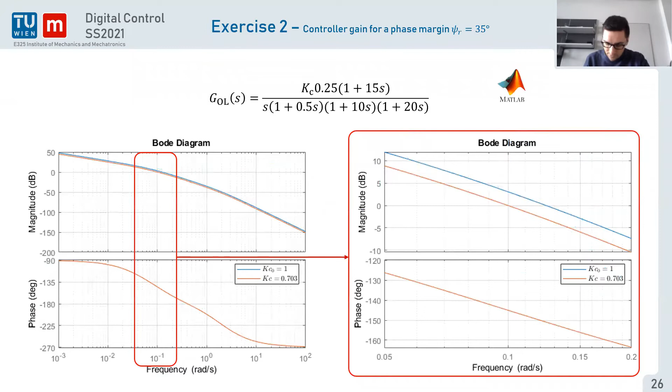And after that, the obvious thing to do is to discretize our controller with these three methods. So remember this backward difference method. I can just go through one of them once again, just to remember what we were doing. So we have our controller in continuous time. We know what Kc is. We found it was 0.7 something. The first method is this one.

It's the backward difference. So backward difference, it's like equivalent to approximating a derivative with a first order difference equation. Okay. So basically it's more or less the same as saying a derivative, or let's call it differently. The underlying idea is that this is more or less equal to y(kT) minus y((k-1)T) divided by the sample time. Okay, this is the underlying idea. It's not exactly this, but it's the idea behind this method.

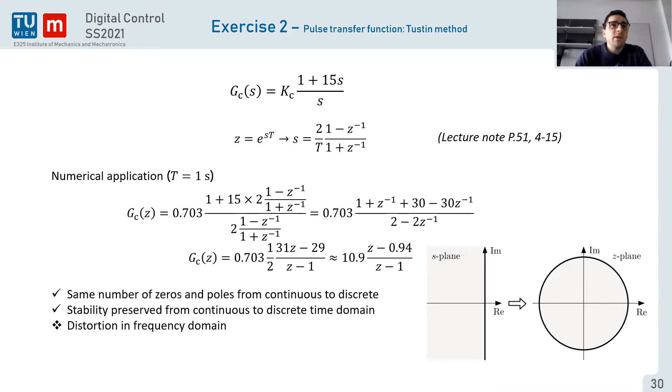So this is for the Tustin method, which is probably the one that you will use most of the time. And finally, remember, there's the matched pole-zero method. Here it's a little bit different. We just take all the poles and all the zeros, and we directly discretize them with the definition of the Z transform. So z is equal to exponential sT.

So to match the gain, we need to define where the discretized version should have the same gain as the continuous version. In other words, if we decide that the discretized version should have the same gain at really low frequency or really high frequency, then we're using the static gain, equivalent to a high pass filter or low pass filter, depending on the transfer function. And if we want to match it at one specific frequency, it's also possible.

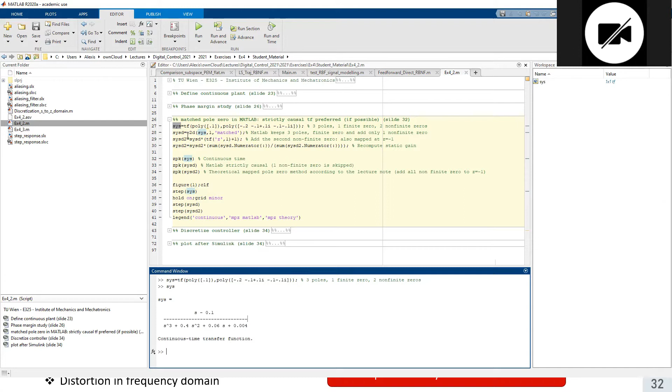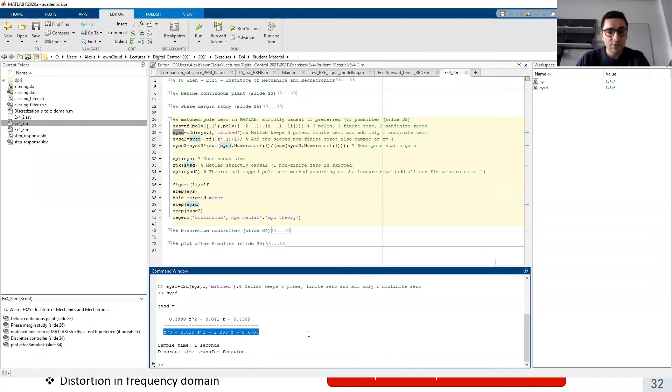So I have 1 zero and 3 poles. And if I discretize it with MATLAB directly, I end up with a system that has only 2 zeros and 3 poles. And in the method we've just seen, we always need to include all the zeros at infinity, and here MATLAB is only including 1.

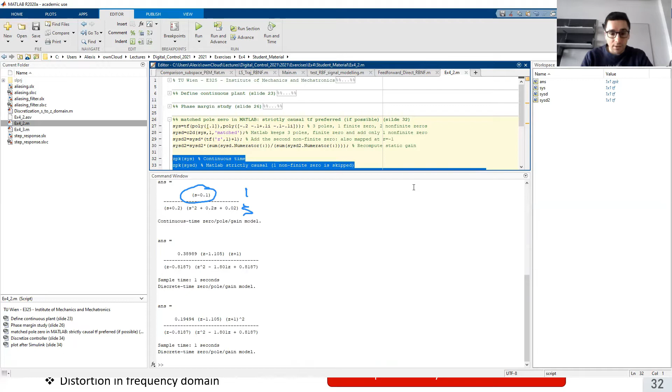So if I compute it analytically, as it is in the lecture notes, then I will end up with this here. So we have the initial system in continuous time that shows 1 zero and 3 poles. And then I know that I should always end up with 3 zeros and 3 poles in discrete time, because here it's equivalent to plus 2 zeros at plus minus infinity times j. And so if I directly use MATLAB, I end up with only 2 zeros and 3 poles. And here is the method that's proposed in the lecture notes, 3 zeros and 3 poles.

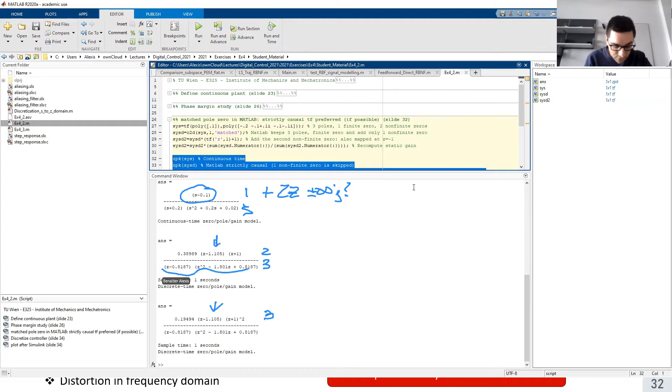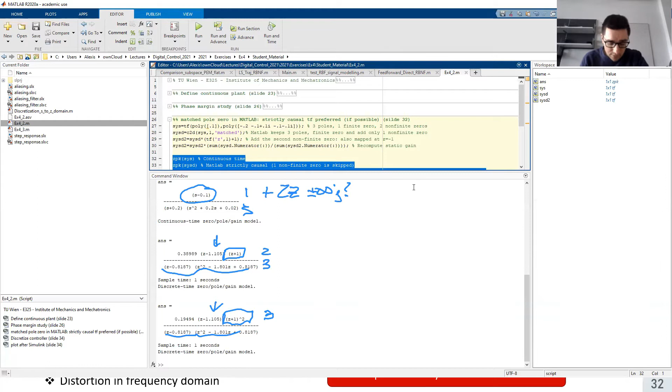So obviously the zero discretized here is the same as the one here, and the denominator is exactly the same, obviously because the discretization is the same. But here in the lecture notes, we should include 2 zeros at infinity, so 2 zeros at -1, whereas MATLAB is only including 1. And so here you can see that this transfer function, the one from MATLAB, is what's called strictly causal.

And this one here, it's just causal. So what it means is that in this transfer function here, remember that I can put all the denominator on the left and keep the numerator on the right. So I can end up with y times, let's say it's a third order, z^3 plus something z^2 and so on, is equal to u times, and I've got only z^2. So z^2 plus something times z plus and so on, okay?

And I can just rewrite this equation as y(k+3), or something times y(k+3). Usually it's 1; here it's always 1 because of how we've written it, but never mind. You can call it alpha 3, for example, plus alpha 2 times y(k+2), and so on, will be equal to, let's call it beta 2, u(k+2), plus beta 1 u(k+1), and so on, okay?

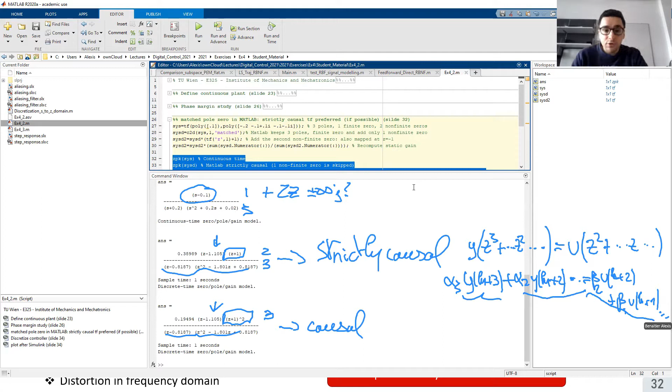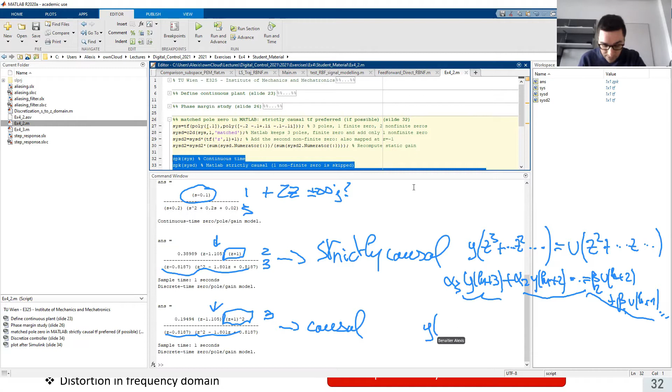And so if we rewrite this, we can see that y(k+3) is a function of previous versions of y, and only previous versions of u. So the current control inputs will not affect the current output. This is what strictly causal means. In the causal case, if I make the same analysis, I will end up with y(k+3) plus previous versions of y equal to u(k+3) plus previous versions of u, obviously with some coefficients. Okay, so this is the difference.

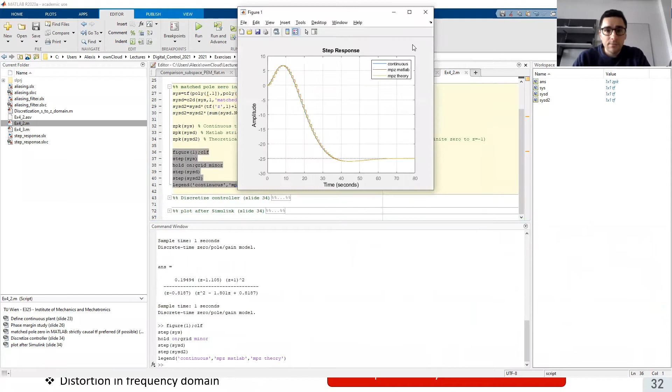And if we plot this, you will immediately understand what I'm talking about. Let me just find the magnifier here. So in blue, it's the original system. I'm just making a step response in continuous time in blue, and then a step response in discrete time with the two versions. The dark orange one is from MATLAB, so a strictly causal system. And the yellow one is a non-strictly causal system, just a causal system.

And as you can see, the dark orange one from MATLAB is never happening before the blue curve, whereas the yellow one is on top of the blue curve, and sometimes it's kind of before. So for example, if I'm looking at this point here, I'm reaching the amplitude 3.24 after 3 seconds, whereas for the continuous time, this same amplitude is only reached at 3.45 seconds, so 0.45 second later.

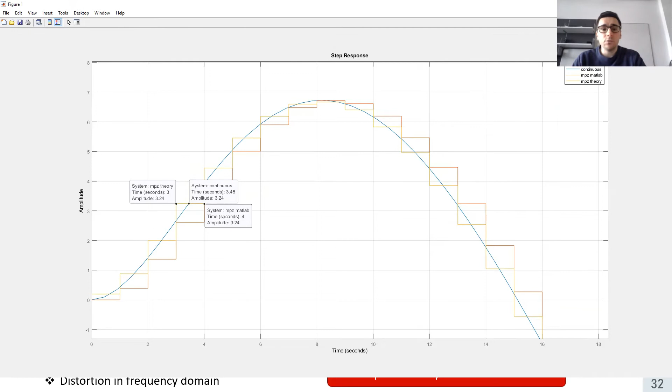This is because it's not strictly causal. And if you end up with a strictly causal discrete version, then you can see that this amplitude is reached at 4 seconds. It's even later. This is the main difference in MATLAB. There are various reasons why MATLAB prefers to do it strictly causal if possible. But it's just to remind you that MATLAB is computing it a little bit differently, so sometimes the results can be a little bit different.

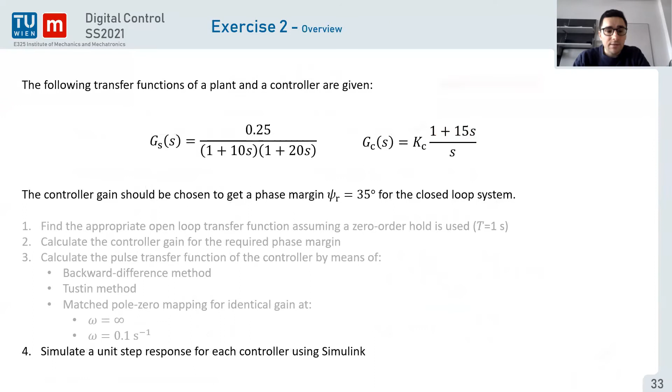Okay, so is there any question regarding these three methods to discretize the controller? If not, we're now going to look at a unit step response in Simulink. So here is how it looks. We're going to do it in MATLAB, so it's going to be easier to see what's happening.

I just wanted to ask if there is some advantage to how MATLAB is doing the transfer function. So yeah, if I just rerun the code here, you see that they are quite close to one another. The only main difference I can see is if you want to implement the controller, then having a strictly causal method usually means, I mean, you should all know what a state space model is.

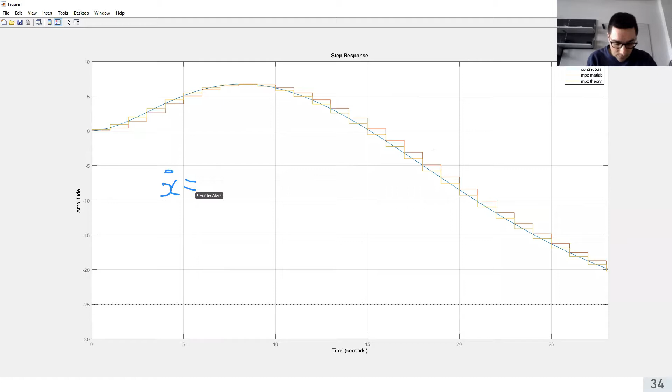Let's put it in continuous time, that doesn't change anything. You will have X dot equals AX plus BU, and Y equals CX. This is a normal form. This is only possible if it's strictly causal. If it's not strictly causal, I will have a D times U here, and this means that it's not strictly causal if D is not 0. So this is mostly the only difference.

Then you can also look at which signal is better at approximating the blue line. Some will say the yellow one is better, some will say the orange one is better. If you discretize it with quite a large sampling time, then it cannot match exactly the blue line. So it's just up to you if you prefer something a little bit shifted to the left or to the right. There's no method better than another one. It really depends on how you're going to use it and what you need it for.

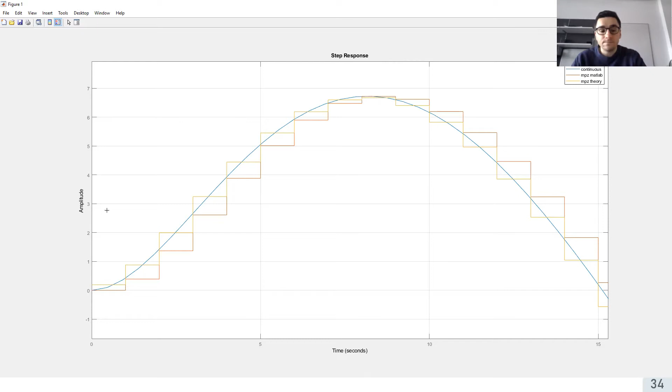Okay. Okay, perfect. Thank you.

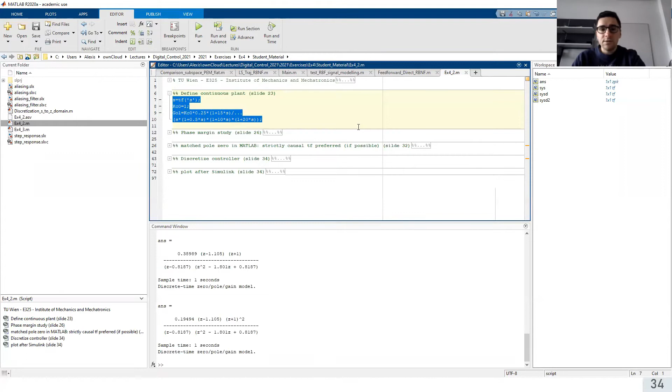So this was what we did. So here I just created the system. We already did it last time. Then we find the gain to fulfill the exact phase margin. We've also seen that. And then we discretize the controller.

So to discretize the controller, first you define the plant here in continuous time. Then you can define the controller in continuous time as well with Kc found before. So it should be 0.7. It's found with the phase margin here. Then you define the sampling time, you define the Z variable. And finally, you can define, as it is in the PowerPoint,

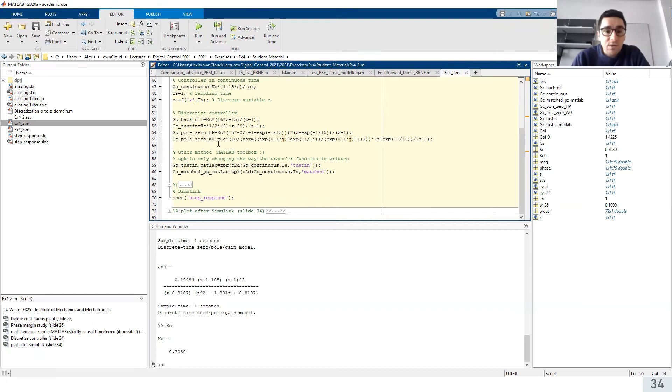the controller discretized with backward difference, Tustin, pole zero matching with high pass filters, so matching the gain at infinite frequency, matching the gain at a pulsation of 0.1 radian per second, okay? And then you can also ask MATLAB to discretize, okay?

First of all, we're gonna have a look at what MATLAB did compared to what we did. So for the Tustin method, it's exactly the same. You can look here, it's the same gain, it's the same discretization for poles and zeros, obviously, but mostly the same gains. And if we look at how MATLAB discretized using the match pole and zeros method here, we cannot specify for MATLAB where to match the gain, okay? So here we end up with 3 different systems.

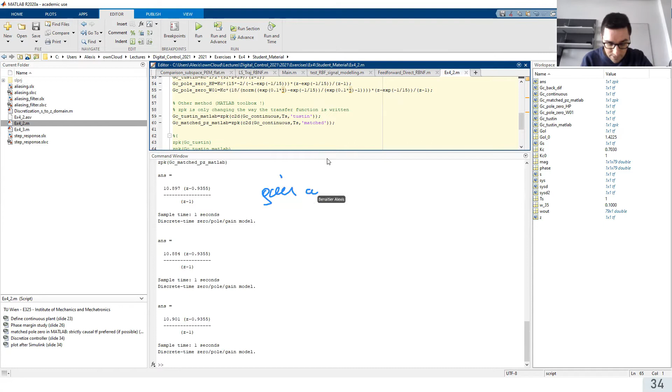The first one here, I cannot see it properly. Here it's matching the gain at infinity. Here it's matching the gain at 0.1 radian per second. And here it's matching the gain at what MATLAB decides, okay? So anyway, what you should remember is that the poles and zeros are exactly the same because it's exponential sT, no problem. But the gain can be slightly different. You see here it's 10.9, 10.884, 10.897, okay?

So most of the time it's okay, you can use whatever you want. I guess MATLAB is more or less always matching the gain at infinite frequency or 0 frequency. If you have only a bandpass filter, I don't really know how it matches the gain, but you can still do it manually. Here, the only thing to remember is that it's pretty close from one another in our example.

And now the goal obviously is to find the step response. So for finding the step response, I just switched to Simulink. I don't know if all of you have already used Simulink before. Just very quickly, we've got our reference step input. So it's a step at 0. So it just starts right at the simulation start. Then you have a step. This will be our input.

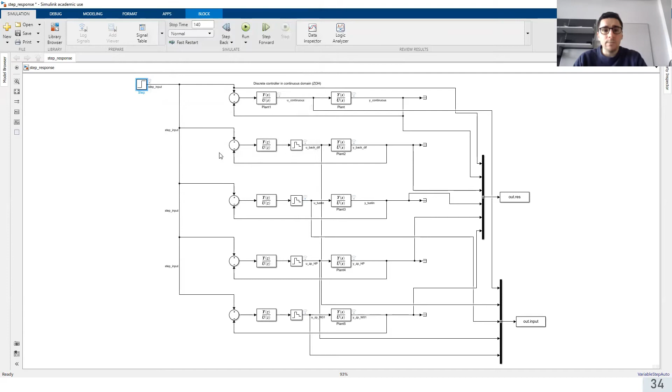If we focus on the first branch here, we have the continuous controller that we defined in continuous time. So there's the Kc gain that we found times, I don't remember, something like 15s plus 1 over s, times this 0.703, which comes from the Kc we found. So this is our continuous controller and the continuous plant. Okay, so this will be the kind of reference we want to follow, but using a discrete controller.

So then the second branch here, we implement the discrete controller with the backward difference method. So it's just the backward difference discretized controller we got here with this transfer function. And we end with our zero order hold block, with the sampling time Ts that is defined. That is exactly the same sampling time as the controller, by the way.

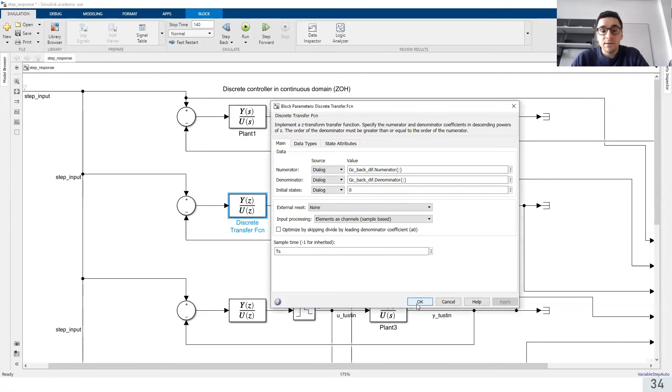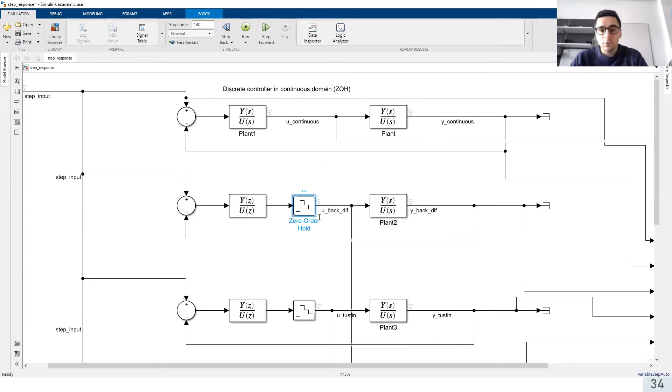So here, this block in Simulink, as it is coded here, is completely useless because this is discrete, there's already a zero order hold at the end. So here it's just a kind of duplication to make it clear for everyone that there is a zero order hold, but it is not useful here. And then we have our continuous plant, okay? And of course, I forgot to mention it, but we always have our feedback loop.

And we do that for the discrete methods: first it's the backward difference method, then it's the discrete Tustin method, and then our two different controllers using the match pole zero method, okay?

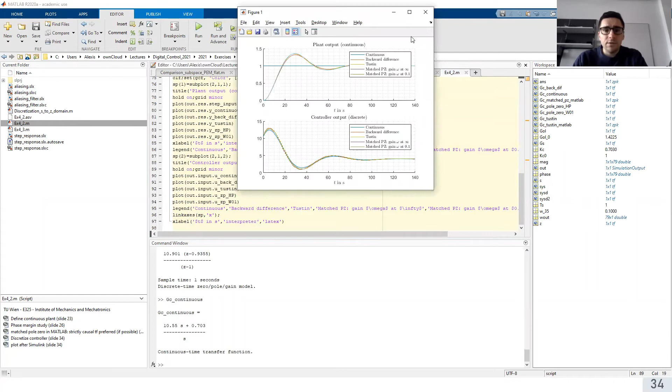So if we run this and then look at the results back in MATLAB, because it's easier to see what's happening. So just a little bit of plotting. Here you can see the results. So on top, you got the plant output. The reference is the blue one. The one that we want to follow is the continuous one, and yeah, the continuous one is the blue one.

And we can also look at the controller output. So the control inputs, the discretized control inputs, and compare it to the continuous time input. So you can see that the discrete input is a little bit different than the continuous input. It's always the case because the discretization of the controller is not perfect. I mean, you cannot have a perfect following of the input, and you want to follow the output. So obviously the input can be shifted a little bit in discrete time.

And here the only main remark I can make for this particular system is that as the sampling time is quite small, you can see if I unzoom, it's okay to use a discrete controller with this kind of sampling time for this plant. If you go back to the lecture notes, you have some rules of thumb to find how small the sampling time should be with respect to the plant's main natural frequencies. And here it's perfectly fine.

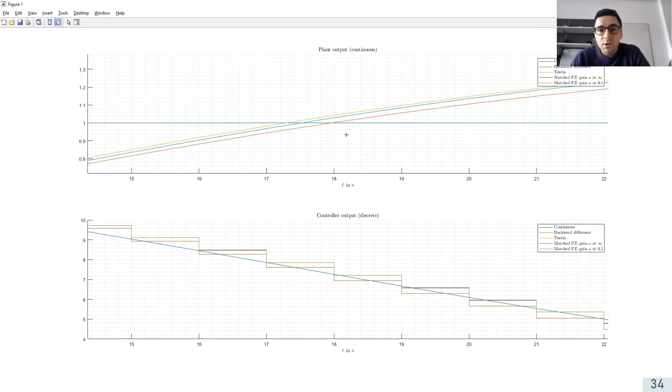So all of these methods to discretize the controller will lead pretty much to the same control input and to the same output, okay? So here we can study the output, for example, the orange signal has a little bit more damped oscillation. So the backward difference is damping the system a little bit here. In terms of rising time, the best one is the Tustin method, and the backward difference is a little bit slower. That's probably why it's a little bit more damped. But all of these controllers will perfectly fit our needs, okay?

Is there any question regarding this discretization of a continuous controller and then the implementation? If there's no question right now, let's go to the first question of today, and probably you will have some questions thereafter.

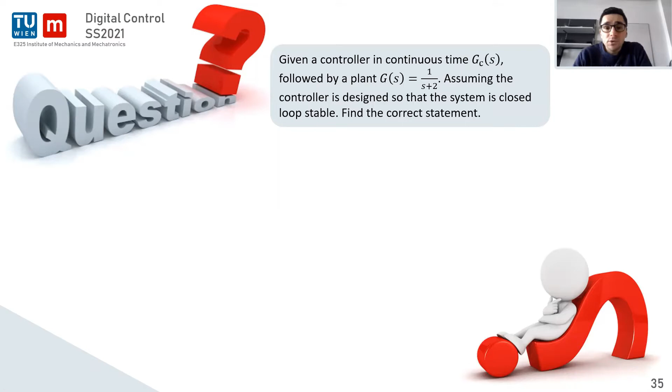So this first question, you're given a controller in continuous time and a plant in continuous time. So exactly what we did, okay? You assume that the controller design is made so that the closed loop is stable. So someone just designed GC of s so that the closed loop is stable. Can be to fulfill some kind of phase margin as we did, or pole placement, whatever, we don't care. We just know that in continuous time, GC times G of s in closed loop is stable. And now we want to, of course, discretize the controller.

So first, discretizing the controller with the matched pole-zero mapping method brings no frequency distortion, only the gain may change. Second proposition is that after discretizing the controller, it is always mandatory to check the closed loop stability in discrete time. Third one is with the matched pole-zero mapping method, two distinct continuous poles can result in two discrete poles at the same location. So that means if in my controller I've got, for example, two poles at -1 and -2, then when I discretize this controller, I can end up with two poles located at the same location in the discrete plane, okay?

And the last one is with the Tustin method, the high frequency poles and zeros are always removed because of the exponential approximation. So the exponential approximation will just kind of remove all the poles that are too fast. Here, worth mentioning because it's not mentioned, we assume that already in GC times G of s, we design GC already knowing that there's a zero-order hold. So the analysis is made already with the zero-order hold, exactly as we did.

In the results, only 43% of the people who answered the poll said that the third one is correct. Okay.

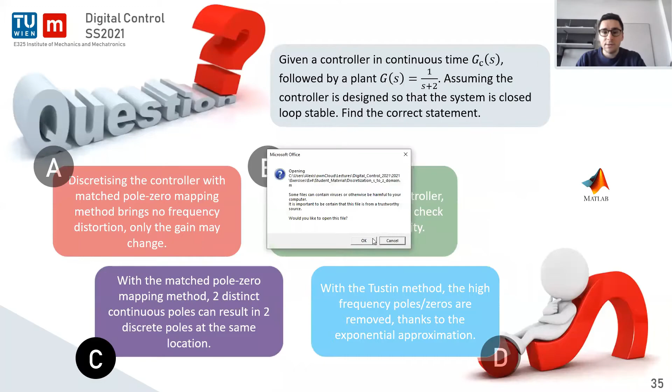So to make it a little bit more evident, let's go to MATLAB and plot how the poles are located. So here I just made a quick code that I will also send you.

And so what the code is doing is it's taking two poles, two complex conjugate poles in the S plane, and mapping them into the discrete Z plane with the three different methods we've seen, okay? And the idea is to move this pole and see how moving the pole in the S plane will move the pole in the Z plane. So stable, imaginary part growing, I guess this is the one I want to plot. So I hope it's going to work, should work.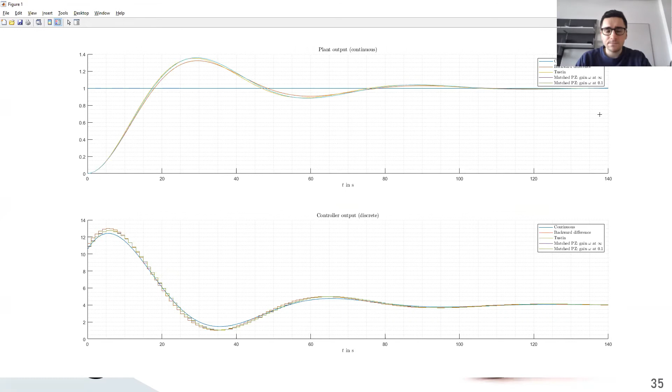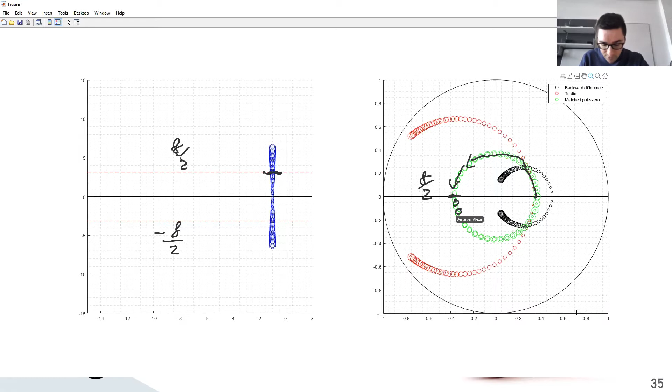And as soon as a pole here is crossing this limit, then you will see that for matched pole and zero, you start here, then you increase in frequency. And when you arrive just here, you are at f over 2, okay? So just when you arrive at f over 2, then with the matched pole and zero mapping, the first pole coming from the top here is going to start going in the bottom and kind of overlap with the other pole for smaller frequencies.

So what I mean is that if I take a pole here, okay, it will be mapped exactly. So this pair of poles here will be mapped exactly as the same poles if I keep the same distance here and there as these two poles, which will have exactly the same mapping if I just take this Nyquist frequency and plot it again here. Then if I take exactly the same distance here, I will also have the same mapping. So these poles are mapped to the same Z poles, okay?

Every time you have a kind of 2 pi revolution, so 2 pi times f over 2, which indeed corresponds to crossing the Nyquist frequency. So you can cross the frequency once, twice, 3 times, 4 times, and so on. And all the poles here, and the complex conjugate here, will be mapped exactly the same as all the poles here and the equivalent complex conjugates, okay?

So if I play it again, you should be able to observe, if you look at the green dot, that just when the blue dot on the left crosses the red dashed lines, the green dot starts to overlap. And this is what's happening with matched pole zero: every time you're at a higher frequency than the Nyquist frequency, you're going to overlap with the exact same location in the Z plane as a pole with the same real part in continuous time, and the same frequency in the continuous plane, plus or minus a multiple of the Nyquist frequency.

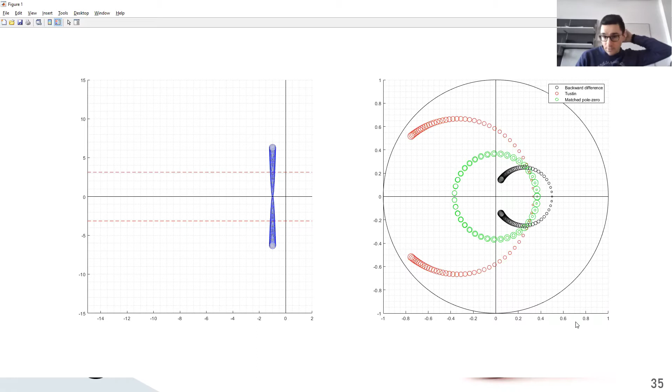Okay, and this is why when you're discretizing the controller with backward difference or Tustin method, all the poles which are different in the S plane will be different in the Z plane. But with the matched pole zero method, all the poles that are different in the continuous plane are not necessarily different in the Z plane. Okay? Is this clear? Because this is really important to understand.

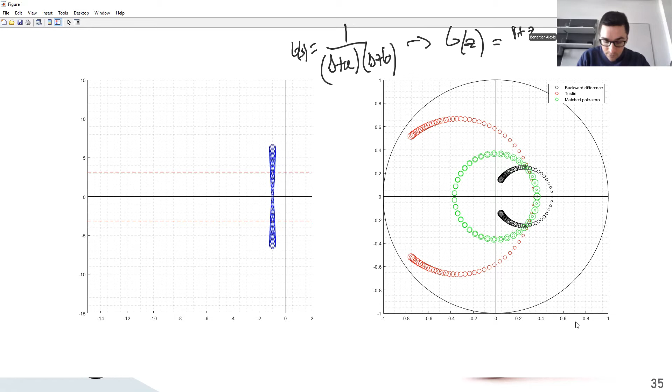If I've got a transfer function like this, S plus A, S plus B, so let's call it G of S, then with the matched pole and zero method, I can end up with G of Z, which here has two zeros at infinity, so that will be located at -1. Here it's not the goal, but never mind, let's write it anyway. And on the bottom, I can end up with 1 plus Z squared.

So I can end up with the same pole in the Z plane for two different poles in the S plane. And this is just saying that A and B have the same real part, but imaginary parts which differ by multiples of the Nyquist frequency, so f/2. Okay.

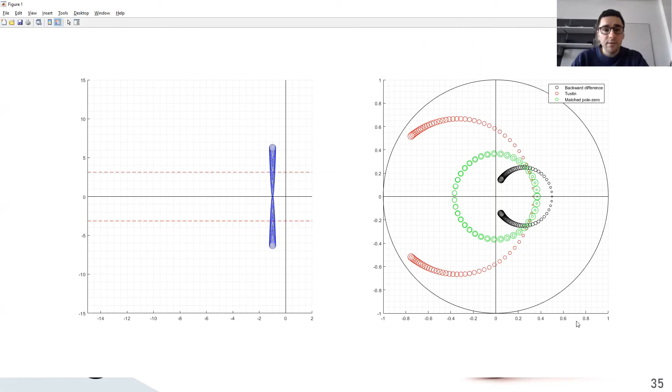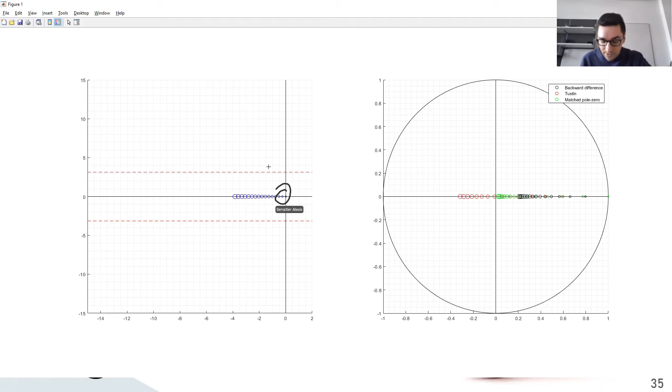Also, now that this is open, I can quickly show you what's happening for real poles towards infinity. This one can be interesting. So here we're just taking one pole and we're putting this pole faster and faster. So it starts as an integrator. So it starts at 0 in the complex S plane, which is equivalent to 1 in the discrete plane. And then we increase it towards minus infinity. So we're making it faster.

And you can see here that both the matched pole zero method and the backward difference method will map infinitely fast poles to 0 here, whereas the Tustin method will tend to map it to -1, okay? So what that means is that with the Tustin method, you will transform a continuous pole that has no frequency, a continuous pole that's just a real part, into something that has a non-zero real part and a kind of an angle, so kind of a phase. And this phase will be the maximum frequency you can have in the discrete time.

So if you have only real poles in the S-plane, then using the Tustin method will give you sometimes significantly different Z poles than using the matched pole zero or the backward difference. Once again, which one is the best one? It's not possible here to say that one is better than the other one. It really depends on what you're discretizing and what your system is.

Also, we can look at real poles towards 0. So here it will be the opposite. So if you're going to 0, in this case, all the three methods will do exactly the same. So if your pole is closer and closer to an integrator in the S plane, then you will be closer and closer to an integrator in the Z plane. So mostly you will converge to 1. Okay. So here you see, really close to 0, all the three methods are mapping it to 1.

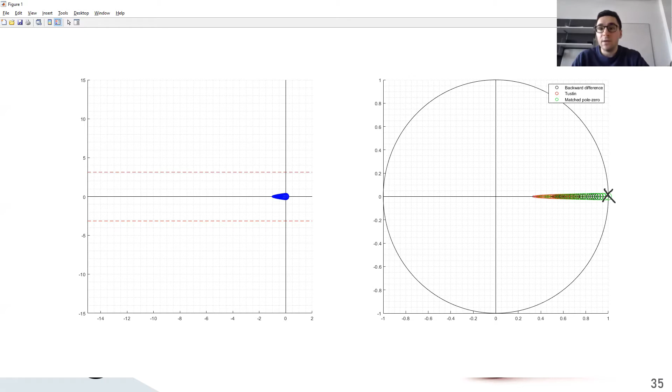Okay. And you can only see the green circle at the end just because they're superimposing each other. If I zoom in, yeah, it's not even possible, because a pole at 0 will lead to a pole at exactly 1 for all the three methods. Okay, so if this is clear, you will have this code at home so you can play with it. Every time you're not sure how it is mapped from S to Z, you can just look at this code and see with the three methods what's happening.

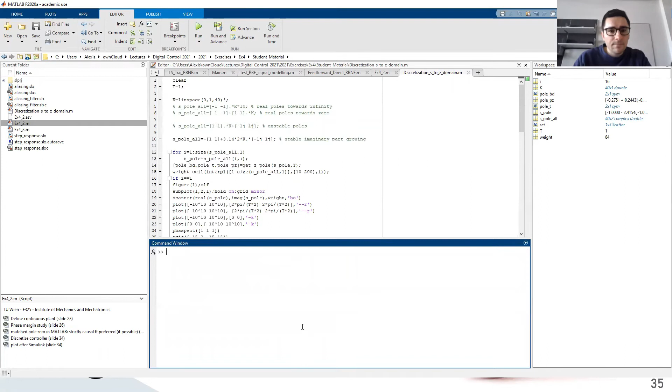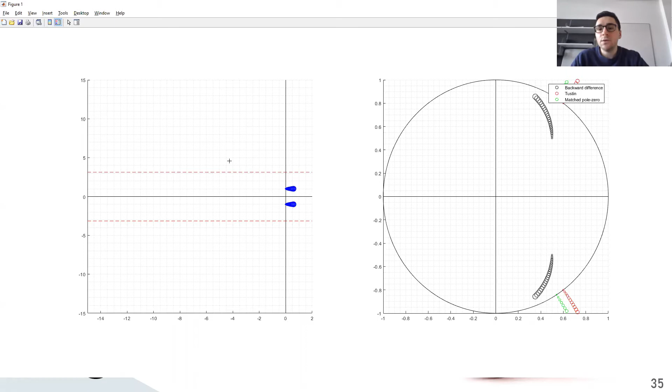Just a last example is if the S pole is... is it this one? So here the goal is to make it unstable, so it's definitely not this one. No, unstable pole, sorry, my mistake, it's this one. So if a pole is unstable in the S plane, you can see that directly the Tustin method and matched pole zero method will place this pole in the Z plane outside of the unit circle, which makes sense. But with the backward difference, you still end up, at the beginning at least, with a stable system, okay?

So we said that every pole that is stable in the S-plane remains stable in the Z-plane, whichever method you're using, that's true. But if you have an unstable pole in the S-plane, for Tustin and matched pole zero, you always end up with an unstable pole in the Z-plane. But for backward difference, it's a little bit more difficult, because remember that all the stable left half plane here is mapped to something here. So if I'm unstable in the S domain, on the right half plane, that doesn't necessarily mean that I'm outside of the unit circle, okay? I can be in this region here where my discrete controller is stable, even if my continuous controller is not, okay?

So this is not used. I mean, I don't see any example where this property is used. That doesn't mean that you can design an unstable continuous controller and then discretize it with backward difference to make it stable. It's not always the case. You can see here that it's probably tangentially going to go outside the unit circle. So it's just a general remark that stable poles are always mapped to stable poles in the Z-plane, but unstable poles using the backward difference method can lead to stable poles in the Z-plane.

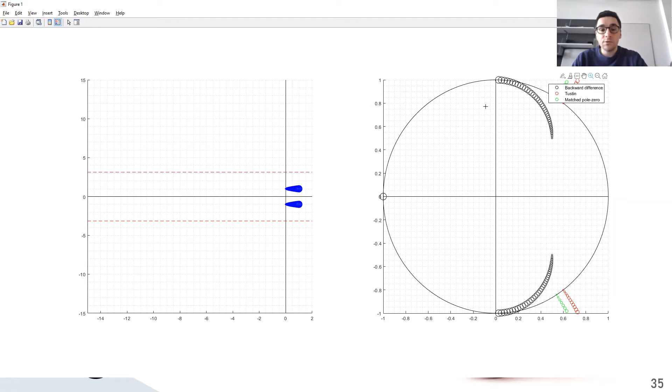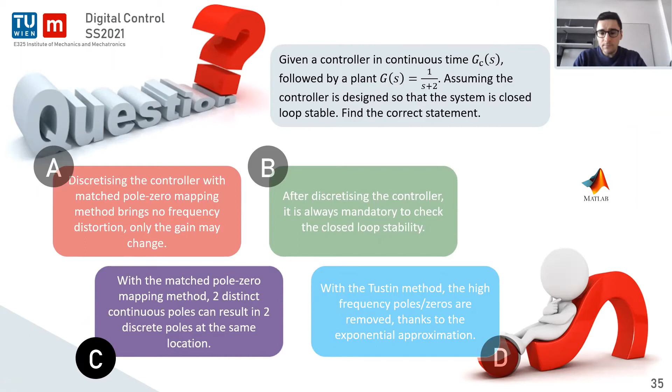Is there any question regarding this mapping, this discretization of transfer function from continuous to discrete time? If there's no question, we can go to the third example. Indeed, the third example is really, really important. It's about aliasing.

The idea is, let's say that we take any system we want, G of s, okay? So here, G of s, I guess it's given in the PDF. I don't even remember what it is. I guess it's just an integrator. Yeah, it's just one pole located at 3, but then we have a closed loop and Gc is equal to 10. So whatever it is, we just have a transfer function.

We have our zero order hold. We have our discrete controller. All of this is defined at the controller. You got the sampler here, you got the controller transfer function in discrete time, and you got the zero order hold.

And the idea is to say, okay, we will have 0 inputs. So if the disturbance is 0 at the beginning, then nothing is happening. I ask to add 0. The control input U here will be equal to 0, and so Y will be equal to 0. Okay. And now the idea is to add some disturbance here. So we're just going to add harmonic functions, just sine waves to start with, and see what's happening

if this disturbance has a frequency omega such that omega can be expressed as a frequency. You know that omega is 2 pi f, so f would be omega over 2 pi. And what if f is much bigger, or just bigger, than the sampling frequency, 1 over T, or also bigger than the Nyquist frequency, which is 1 over 2T? So if the disturbance is faster than the sampler, what is happening? Because the sampler cannot capture this frequency.

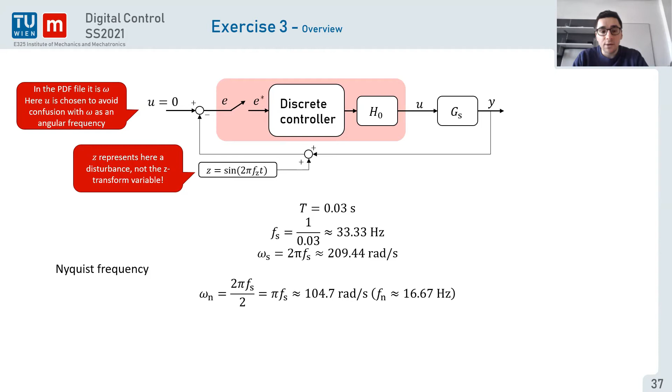So the system output should always have the same frequency as the disturbance if the input is 0, obviously, because we have a linear system. So if z is equal to sine of 2 pi times 1 hertz times t, then the output will be some coefficient A times sine of 2 pi 1 t plus a phase shift, okay?

We know from linear system theory that if the input, in this case minus the disturbance, has a frequency of 1 hertz, 5 hertz, 10 hertz, then the output will have 1, 5, 10 hertz. The question is, what's happening if the disturbance frequency is way bigger than the Nyquist frequency? This is where aliasing will appear. And also what happens if it's strictly equal to the Nyquist frequency, a special case that can be quite a big problem.

So if we try to find an analytical solution for y in the S domain and Z domain, we have our plant here in the S domain, we have our zero order hold, which I wrote in the S domain and then switched to the Z domain. So this will be my zero order hold, and my plant is still 1 over s minus 3, and so on.

And so if we look at our system now, I made a video. Let's play it at the beginning. So on the top, you have 3 signals. The blue one is a continuous disturbance. The orange one is the output. And the black one is the disturbance sampled.

So if you remember, here it's not strictly speaking Z, it should be minus Z because it's a feedback loop, but never mind. I'm just gonna write it here so that you all remember what it is. We got Z, then we got our sampler, then we got our system, the controller, the zero-order hold, our plant G(s), and then our feedback loop here, and we just put minus whatever it is.

And so the idea is Z in blue is a continuous signal, and Z in black with dots is kind of Z star, the sampled version of Z. And we'll see that the sampled version of Z shows some frequency, and the frequencies in this sampled version will be exactly the same as the ones in Y, obviously, because up to here it's a linear system, or can be approximated by a linear system, remember.

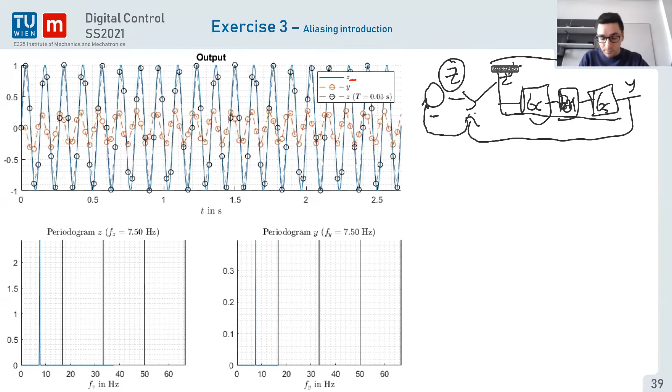So what's happening if the disturbance is lower than the Nyquist frequency? You can see the Nyquist frequency, or multiples of it, on the two graphs on the bottom. So if the disturbance is lower than the Nyquist frequency, for example here it's 7.5 hertz, whereas the Nyquist frequency is around 17 hertz, then the output will show exactly the same frequency. And wherever the disturbance is between 0 and the Nyquist frequency, the output is always exactly the same frequency, okay?

So this is perfectly known from linear systems. It's exactly the same as in continuous time, and it's perfectly fine. Now the question is, what's happening if the disturbance frequency is equal to the Nyquist frequency? If it's perfectly equal, you can see that every time the sampler is taking a value, it's always the same value in the sinusoid, okay? So the signal that the controller sees is 0.

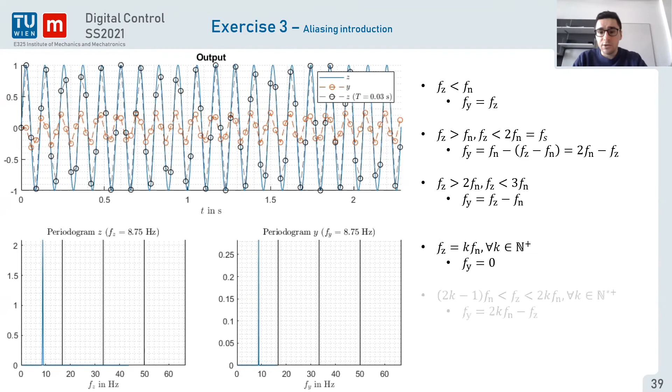And then if you are above the sampling frequency here, then you will still be here because Fy would just be equal to the disturbance frequency minus the Nyquist frequency. Okay, so you can also generalize all this formula and you will find this equation here. There is a mistake here, it's 2Fn, so it's Fz minus f sampling, fs, okay, but whatever, it's not a big problem.

If you take the general formulas here, what is it saying? That if the disturbance is increased, first the output is increased, then as soon as you cross the Nyquist frequency in the disturbance, the output frequency will go in the other direction. And then when you cross the sampling frequency, so 2 times the Nyquist frequency, the output frequency will increase again. And then you cross 3 times the Nyquist frequency, so the output will decrease again, and so on. So the output is just varying between 0 and the Nyquist frequency.

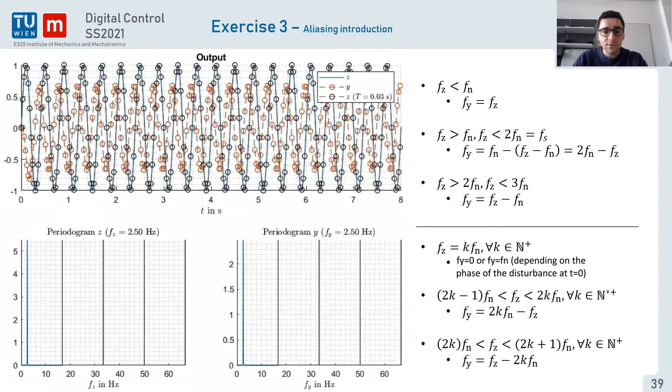And now to answer the question that we had to answer here. So here the idea is what would be the output frequency for a disturbance frequency of 34.7 Hertz, for example. So 34.7 Hertz is this red point here. And so the idea is to say, okay, this red point is a little bit faster than the sampling frequency. So I know that the frequency that the system will see is the difference between this red dot and the sampling frequency here. The sampling frequency is 33.3 Hertz. My disturbance is 34.7, so the output will be 1.4 Hertz, okay?

If we look at the second point, we can make exactly the same analysis and say the output frequency will be this one here, from the sampling frequency to the actual disturbance frequency. So it will be 49.3 minus 33.3, which is 16. But we can also see it from the other perspective. So we know that here our output frequency will be the Nyquist frequency. So here we are at 50, it's 3 times the Nyquist frequency. We want 49.3. So we just take 50 minus 49.3, which is equal to 0.7 Hertz, okay?

And we need to remove this difference from 1 Nyquist frequency, because the output will be on the line, but a little bit before. So it's 16.7 minus 0.7, okay? And we can do the same construction for the blue dot, whether we say that we are at 0 here, and so we have minus 9.4 Hertz, or we can say that here we are at the Nyquist frequency that is 16.7, and we need to remove 7.3, and it leads to exactly the same results. Is this clear?

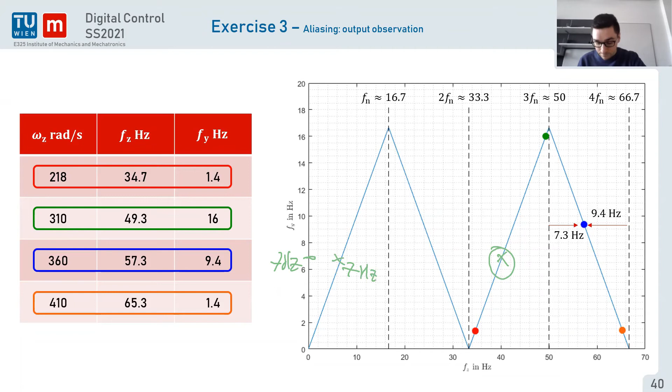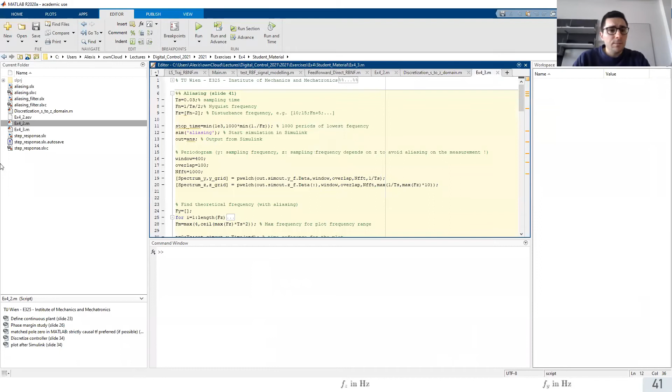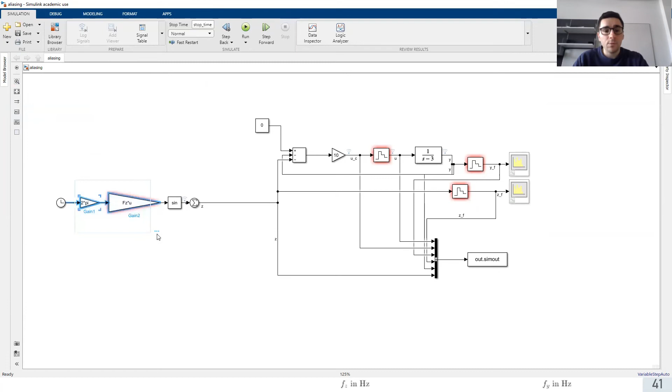So before moving to the question, let's first look at this MATLAB code. I will also provide you this MATLAB code that can be quite handy to understand what's happening. The MATLAB code is based on a Simulink that is right now opening. In this Simulink, we have our disturbance here. That is 2 pi times the frequency times the sine. It's just a sine wave, and then take the sum if you want to have multiple sine waves in the disturbance. And then this is just for the plot of the periodogram, so which frequency I have in the disturbance and the output.

And here is my system. So I've got my feedback loop here. This is just completely useless, I don't know why I've added it here. Never mind. I've got my controller that is 10, the zero-order hold, and then the plant. Okay.

So as we've just seen, if I take 10 Hertz in the disturbance in this case, then you'll see that the output will show 10 Hertz. We've already seen that. If now I add another frequency at the Nyquist frequency -2 Hertz, for example, then my disturbance will show two frequencies, one at 10 almost, and one at the Nyquist frequency minus 2, so it's 14.67. And once again, in the output, I can see these two frequencies.

So in the output, remember also that the frequencies do not have the same amplitude. This is because the plant is acting on these frequencies. And so obviously they are not all the same amplitude. Otherwise, it would mean that the plant is just one, a transfer function with unit gain.

And now the interesting part is if I add Nyquist frequency +2, what you can see is that now the disturbance shows one frequency at Nyquist frequency +2 Hertz, plus the one at 10 Hertz. And in the output here, we have now aliasing. So we have the same output for the 10 Hertz, no problem. But we have another frequency at 14.6 Hertz instead of 18.6 Hertz. And remember, this is because in the output, the frequency that should be here is just mirrored.

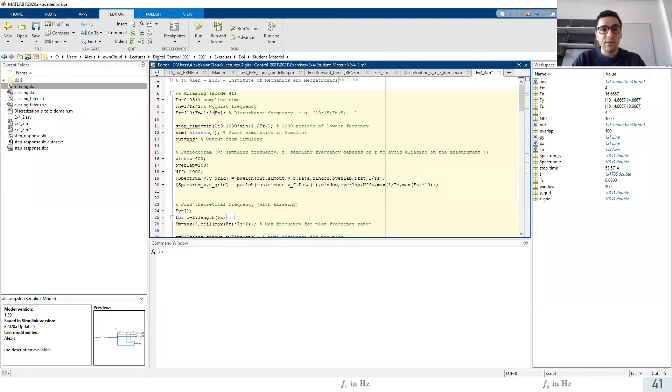So is everything clear about aliasing, how it's appearing, how it's behaving? I can also add some really large frequencies. So Nyquist frequency +1, or 3 times Nyquist frequency +4, for example, and everything will once again be mapped between 0 and the Nyquist frequency, okay?

Now, if everything is fine, let's move to the last question for today. The question is: when you're sampling a continuous signal with T = 1 second, aliasing may appear. So you've just seen that. Which is the correct statement? There is only one correct statement.

The first one is that using a low-pass filter on the continuous signal prevents aliasing by removing the higher frequency. The second one is that aliasing will appear only for frequencies higher or equal than the sampling frequency. Third one is that aliasing will show different behaviors depending on the sampling method. And the last statement is that knowing the sampling time and the sampled signal, it is possible to identify if aliasing occurred. So let me just share the poll once again.

Poll is closed, and it should be this one. Okay. Now you should all see the poll, and just please take some time to answer the poll again. So here the correct answer was the first one. Really quickly, second one, nobody answered.

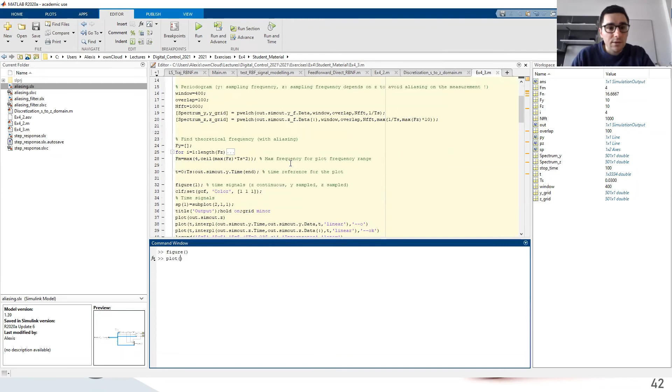If I show you this signal here, so the proposition was knowing the sampling time. The sampling time, I can give it to you, it's 0.03 seconds. And the sampled signal, so I can just plot the sampled signal. I just don't remember how it's called. The sampled signal is called output time data. Should be this one, out.simout, or this one, probably this one. So this is my sampled signal.

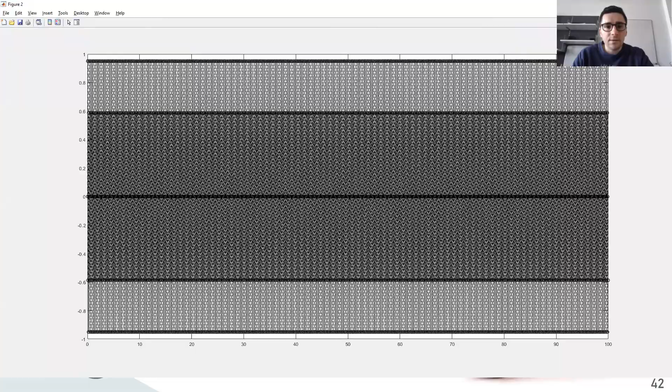Just going to zoom in. The sampling time is 0.03 seconds. Here's the sampled signal. It shows some frequency here, it's 10 hertz. Can you say if there is some aliasing? We're going to say no, because it's only one sine wave at 10 hertz.

So if we look here on the graph, what you will see is mostly this. Here it's not the sampled signal, it's the output, the processed sampled signal, but as our system is linear, it's just the same frequency as the sampled signal. So here one may say there's no aliasing, it's just one disturbance of 10 hertz. And in this case, it's true.

Now, remember, if we add a signal at, for example, 2Fn plus 10, the Nyquist frequency times two plus 10 will work. Don't want to count what it is. So here I'm adding another frequency at 43 hertz. And interestingly enough, I end up exactly with the same. Here the power is a little bit changed just because I've got two frequencies instead of one that are folded to this 10 hertz frequency.

But it's impossible to say that here the frequency fz is equal to 10. I know that fz is equal to 10, plus eventually something at 2 times the Nyquist frequency plus 10, but it can also be 4 times the Nyquist frequency plus 10. And 2 times the Nyquist frequency minus 10 will work also.

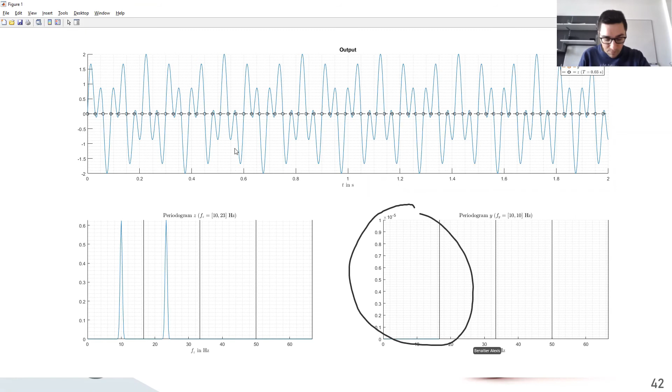So I can just demonstrate this if I'm not wrong. If you take 2 times the Nyquist frequency minus 10, it should also be located at 10 Hertz. Okay, and it's completely disappearing. So here now in the output, I've got nothing in the output, but the input has 10 Hertz and something else. So here, just to remind you that when you have a sampled signal, it's impossible to know if some aliasing appeared or not. So you cannot be sure of what frequencies were on the input signal, okay?

And to avoid this problem, and this was the first proposition, if we go back to the PowerPoint, using a low-pass filter on the continuous signal prevents aliasing by removing the higher frequencies. And this is really important. It's called anti-aliasing filter. The most common one is a low-pass filter.

So here I've got exactly the same setup. I will define one frequency at 10 Hertz to start with. I will disable the filter and I will add another disturbance as, let's say, 2 times the Nyquist frequency plus 2, for example. So here nothing will be different. As usual, we have 2 frequencies and one just gets some aliasing, and so it's showing this really low frequency here in the output at 2 Hertz.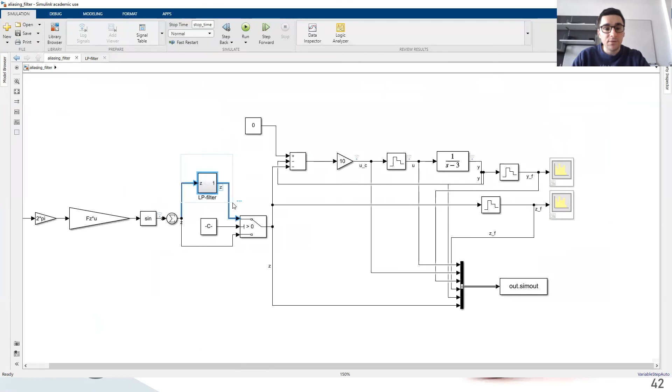And now I'm going to enable a low-pass filter. So if I open this second Simulink model, it's exactly the same as before, only here I've got the low-pass filter now. And this low-pass filter is a Butterworth filter. You can look on Wikipedia what it is. Just remember that it's a kind of low-pass filter. And I will set this low-pass filter to the Nyquist frequency and filter order to 4. So this filter order will just tell you how fast it will damp frequencies above the Nyquist frequency.

And if now I run this, I get rid of the aliasing problem. I've got 10 Hertz here. I've got something here that is barely possible to see anymore because my low-pass filter is acting for all the frequencies above this red line, which is the Nyquist frequency. So in the disturbance, there's still a little bit of this frequency, but it's really damped a lot. And so in the output, I've got the frequency I want, 10 Hertz, and the other one also is damped a lot, okay? So if you want even a higher damping, you can increase the order of the filter, and now it will completely disappear.

Problem is if you do that, then if you have a frequency that is really close to the Nyquist frequency, if I make like 0.1, so here this frequency is before the threshold of the filter, but already you can see here, it's completely damped already. Remember that this frequency here should be the same as the first one. So if I remove the filter, in my disturbance, I will have 2 frequencies that almost have the same power. Yeah, it's not really power, it's periodogram, but never mind, they carry the same energy if you want.

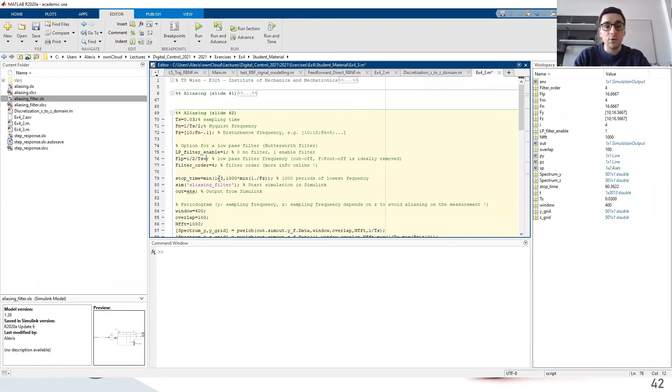And if I add a filter, because my filter order is really strong, if I got a frequency just before the filter, so I shouldn't touch it, it's already damped, okay? So this is the classic problem with anti-aliasing filters: having a filter that is strong enough to really remove the high frequencies, but not so strong, so I still do not damp this frequency that much. And so usually you're not taking the Nyquist frequency, but you can also add a little bit, 2, 3 Hertz, whatever. And if you're doing it, then it's much better. You see the damping, it's much lower. But here I can still have quite strong aliasing because I moved my low-pass filter's threshold to something a little bit higher than the Nyquist frequency. Okay.

So remember that every time you want to collect points, you want to measure something, the sensor usually is discrete time. Make sure that there is a filter, because if you don't filter the data first, you always know that there's a lot of disturbances with really high frequencies. In this case here, for example, you would probably see 50 Hertz frequencies usually, because the network grid is 50 Hertz. You can also see some multiple of 50 Hertz or whatever other frequencies. If you do not apply a low-pass filter on the data before collecting some samples of the output, then you will have some aliasing, and it can be really dangerous.

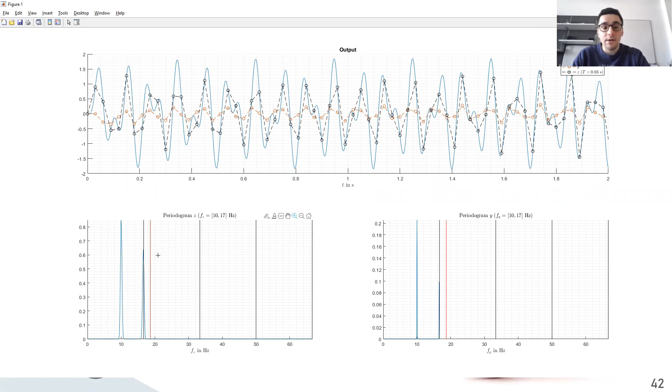Okay, I have a question. Yeah. Where in the block diagram is the filter applied? Here, so the filter, I just showed it. You got the input here. So here I've got Z. I can rewrite it differently. So I can say that this Z here, D, is equal to a sinusoid of 2πf1t plus 2πf2t. So I've got multiple frequencies in my signal, and here is the filter.

So the filter, if I draw the block diagram once again, you got Z, then you got the sampler here. Let's do it like this. You got the controller, the zero-order hold, you got the plant, okay? Then you got the feedback, and here you will just add the disturbance and minus the feedback. Even if the disturbance in the PDF is here, it doesn't change anything. And so where you want to filter is before sampling. So here will be your filter, okay? You always filter the data before sampling the data.

So usually you can have a somewhat different setup. Usually everything here is G, C, G, the hold, whatever. In here you will have the reference, you will have the sampler, you will have the output. Usually the reference here is already, so this is completely different. Here the reference U is already discretized. Usually you already know the reference that you want, you already discretized it somehow. And as it's a reference, there's no disturbance, because it's something you want to follow.

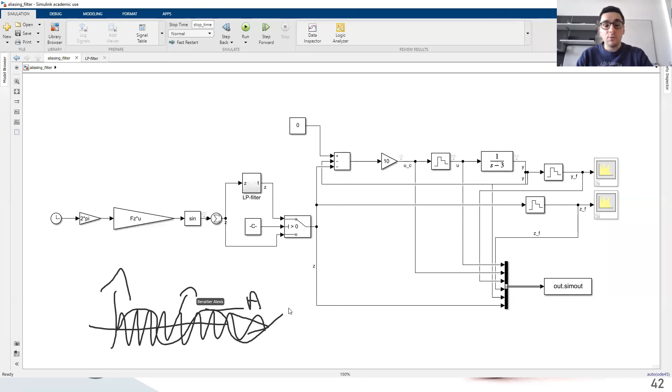Also, if you look at two sinusoids, at Z, one sinusoid like this with an amplitude A, and another one like this with the same amplitude, this one will carry much more energy. So the one with really high frequency will carry much more energy. So if you look at the periodogram here, one frequency with a peak with the same amplitude in the periodogram can mean, quantitatively speaking, that the amplitude A is much bigger than the amplitude of this one, if I call it B. This is because a sinusoid will inherently always have higher energy density for high frequencies.

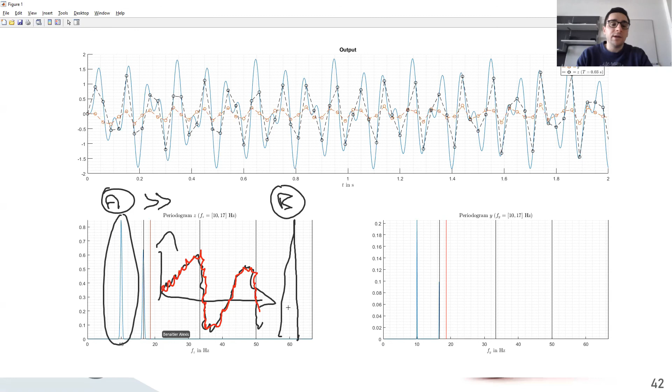So if I just draw here an equivalent of the system, I will have a nice sinusoid. The sinusoid here refers to this frequency here. And all the small deviations here, in red, are a really high frequency that looks to have only a really small amplitude. So you could say, okay, it's not a problem. Indeed, it is a problem, because even if the amplitude is quite small, in the periodogram it will carry a lot of energy. So that's why you always need a filter or make sure there's no high frequency content in your measurements.

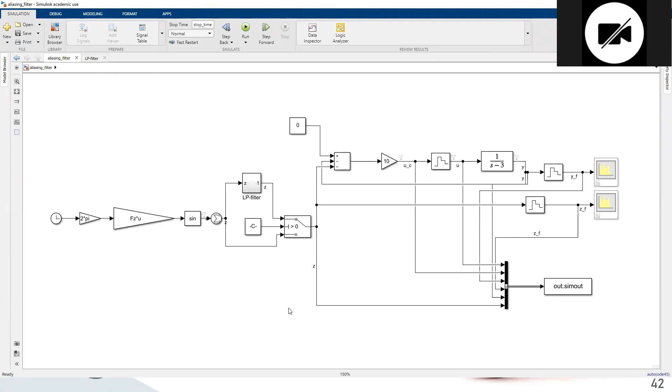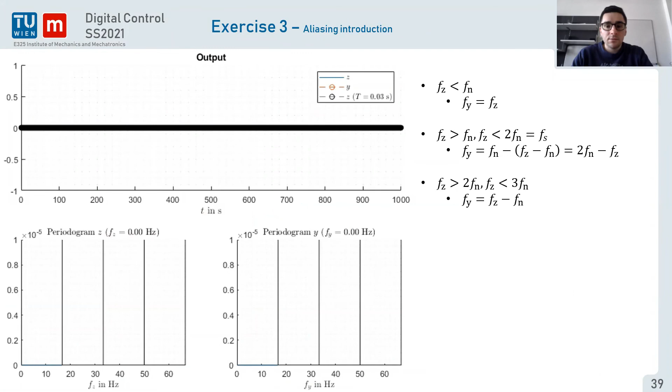Is it clear now? Yeah, okay, thanks. And just to be sure, the disturbance which has the higher frequency remains uncontrollable? It's a disturbance. You cannot change the disturbance, but before putting it into the system, you can, I mean, here it's quite tricky, because when we're talking about the disturbance in this example, if I go back to the block diagram, okay, here, stop.

Here's the block diagram that now you should be able to see. The disturbance is acting on the feedback loop. So it's not the same disturbance as something like this, okay? The disturbance that will arrive here, I cannot control it. I cannot filter this disturbance because it's acting inside the plant, okay? But the idea is when I'm making the measurements, I can say that there's the output y coming from the u, let's say y of u, plus some y of the disturbance, okay?

It's not always rigorously okay to write this, but this is the idea. The idea is I will take the output, and I know that in the output y, I can only have frequency between 0 and Nyquist frequency. So everything that is above here, I want to remove, okay? Because everything that is above can also come from a disturbance here.

So here we're just using the filter in this place before, and for this filter we don't care about filtering it because it's 0, so it's really filtering the output. And it's not filtering the output that has an important content, but it's filtering the output that shouldn't be here, okay? So we're not applying a filter in here.

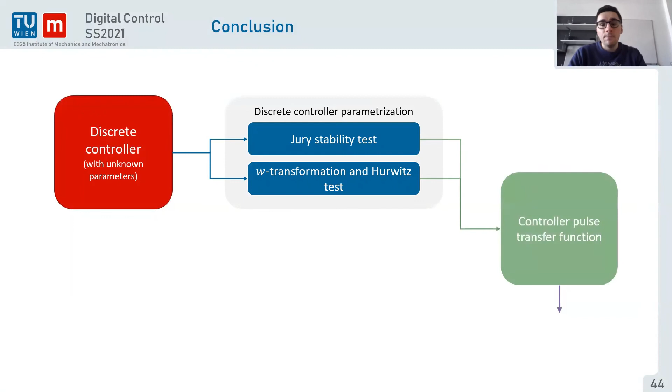Now I just want to make a quick conclusion, and then I can answer further questions. So we've seen today a discrete controller with unknown parameters. We've used the Jury stability test and W transformation and Hurwitz test, that was last week. And with that, we were able to design a controller pulse transfer function, a controller transfer function for a discrete controller.

So here the idea was, I know what the discrete controller is. I'm just finding its parameters to be sure that the system is stable. Then we design a continuous controller in continuous time with classical methods, and then we discretize it. And we've seen mainly 3 methods: finite difference method, Tustin method, matched pole-zero mapping method.

And finally, we've seen what aliasing is, how it can appear, and what we can do to remove aliasing, or at least damp the high frequency content of my output that shouldn't be here. Okay, so I hope that this is quite clear for everyone. You will also have the MATLAB code, so you can play around with it and see what's happening.

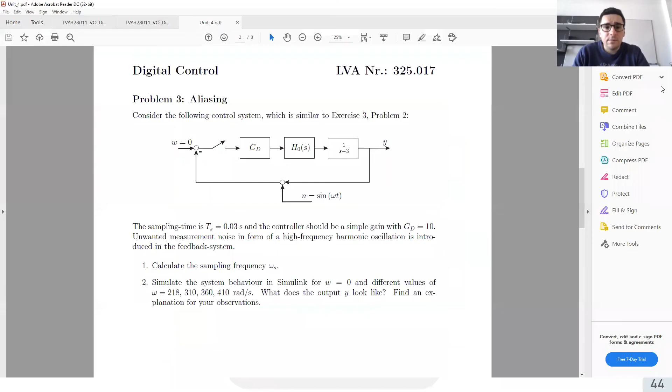And now, do you have any questions regarding this session or the sessions before, or general questions, remarks? If you don't have any questions, you will have, as usual, 2 weeks starting from now to do homework session 4. Homework session 4 is not about aliasing, if I remember well. It's just about some control.

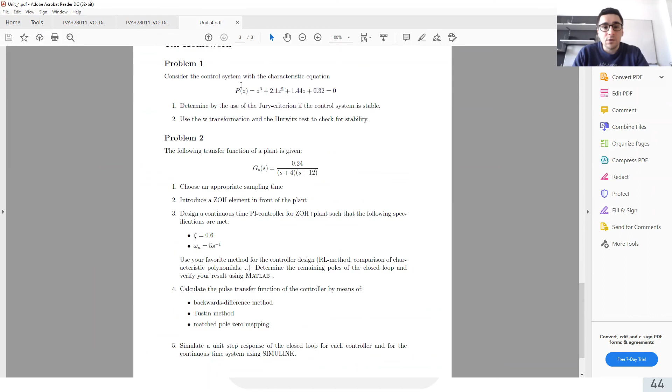So first, it's finding the parameters of a controller. It's not the controller, it's directly the closed loop denominator, the characteristic polynomial. And the second problem is just discretizing some controller. You can reuse the MATLAB code, Simulink code, and just comment on what's happening.